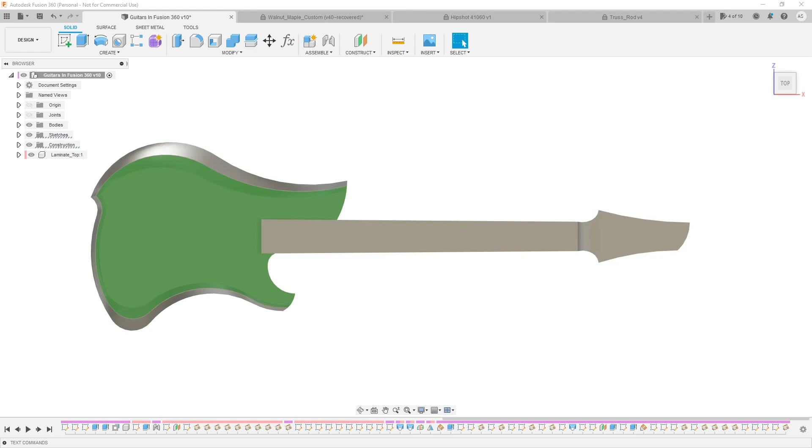Now we're actually almost done with the guitar. Most of the hard work is pretty much done. So we've got the main portion of the body, we've got the neck, we've got the headstock, we've got our laminated top, and there's not that much more to do except for the nitty-gritty details.

So today what I'd like to do is get the truss rod installed into the truss rod slot, the fretboard, the fretwire, the nut, and the bridge in place, and that should give us enough information so that we can know where to place the tuners, where to place the pickups and the pickup slots, and our electronics cavity and knobs, etc. in the final episode.

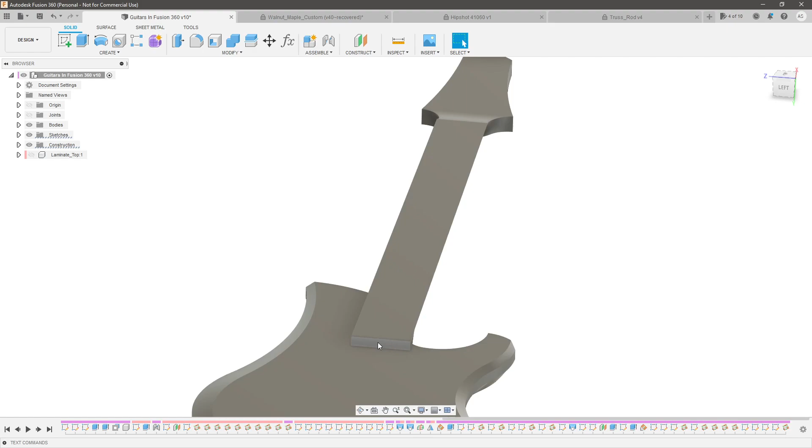Okay, so first things first, we want to get the truss rod slot cut into the neck. So let's hide our laminated top, and let's talk about the truss rod. There's a couple different types of truss rods that you can put into a neck. What I'm going to be using is a spoke wheel style, where there's a spoke at the end, or the heel end of the neck, rather than the type that protrudes outside of the headstock.

Now, the reason I chose to go that route, other than looks and accessibility, which I generally prefer the spoke wheel style anyway, but because I like to place my volute a little bit further back, that ended up making this section of the neck a little bit narrower than I would have liked. And so I don't want to cut into that neck any more than I already have, to prevent any disaster down the road. So what I actually would like to do is cut a spoke wheel style, which means it's going to be from like here on the neck all the way to the heel.

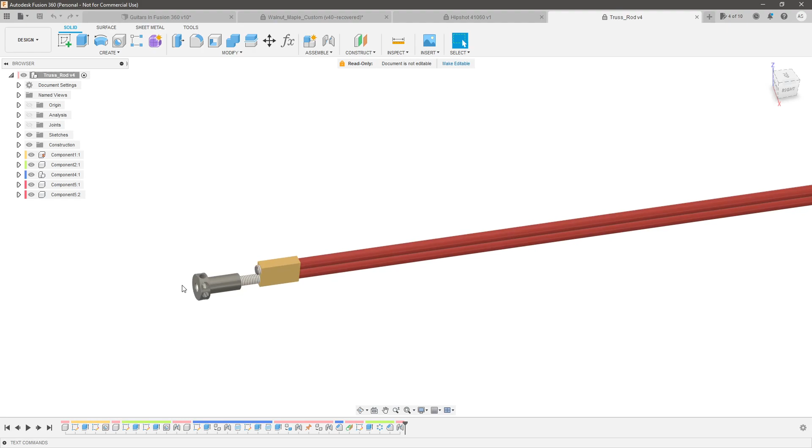So what's really nice is on StewMac's website, the Spoke Nut Hot Rod Truss Rod, it's quite the name, they have the dimensions right here. And that was enough information for me to go ahead and model my own. It took a little bit to extrapolate some of the dimensions out of there, but I was able to go ahead and model a truss rod, and I'm going to use this for my dimensions to cut into the neck.

So let's see where we're going to start. We're going to start from the spoke side up. So we've got a 1/2 inch diameter spoke connected to a 0.3125 inch diameter shaft connected to this block right here, which we'll end up cutting. So let's go back and let's start from right here.

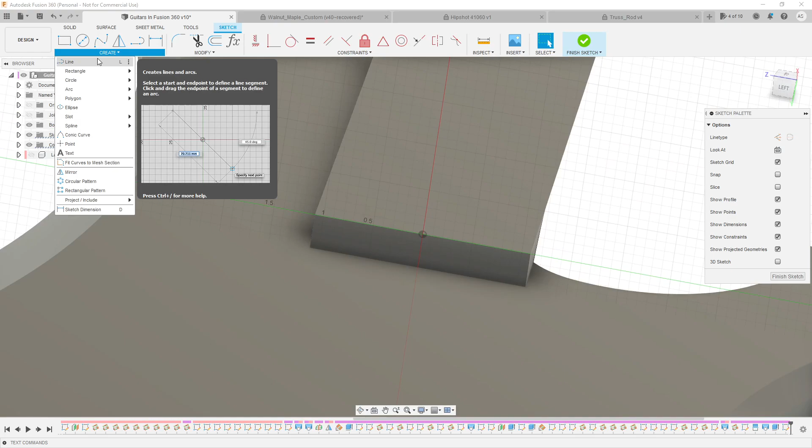Okay, so what we need is a midline. Make that midpoint. And we need it to be at least a 1/2 inch, but really because you're going to be rotating this and there might be a little slop, give yourself a little bit more. So let's do 0.625 inches to give ourselves a 1/16 on each side. And then we'll go ahead and just make it a rectangle. Okay, now what is the distance from here to the bottom of this?

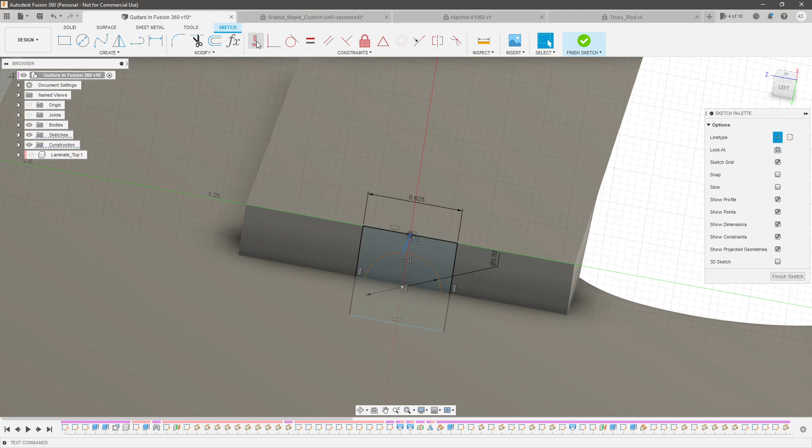Actually, we can distance it from the top. So we've got 0.0729 inches from the top of this surface to the top of the spoke. So let's give ourselves a circle, make it a construction, make it 1/2 inch. Let's make it centered or vertical to the midpoint. And let's dimension from this arc 0.0729 inches. Okay, so that needs to be the very bottom.

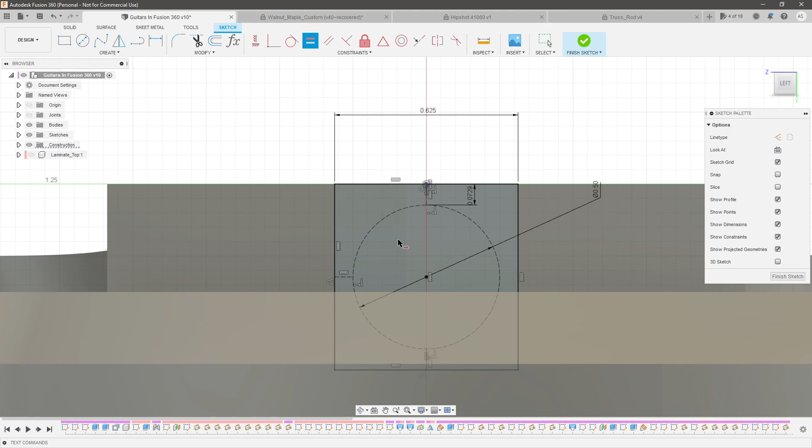That needs to be at least where this square needs to go down to. And since we went ahead and gave this, let's do that. Make that vertical. Give ourselves another line down here. Make that vertical. That way we can keep the distance equal on all sides. What we can do is just make these two equal. Actually, I guess I didn't even need that. So there we go. So that's the channel we need to cut out.

So how far do we need to cut it out? We need to cut at least the thickness of this, which is 3/16 of an inch, or 0.1875. I'm going to give myself a little bit more breathing room than that. So let's go ahead and cut it back 1/4 of an inch, negative 0.25 inches. Okay, so that's where the spoke is going to sit.

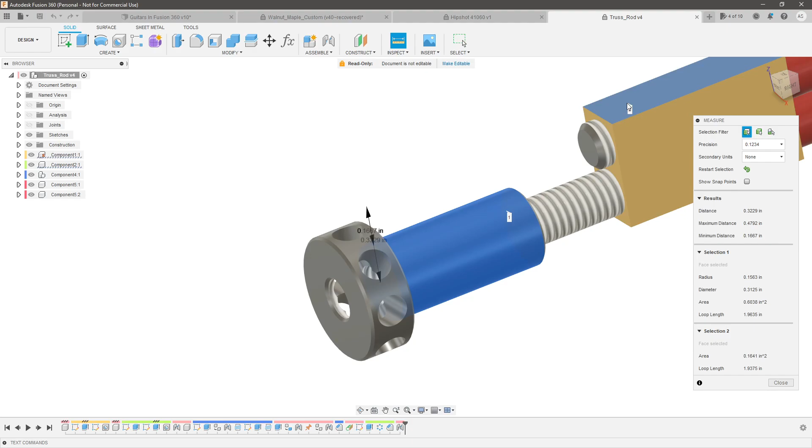Now we need to cut room for the shaft. So let's see, we've got 0.3125 inches. And what's the distance from there to there? Actually, we can just do it on center. So let's sketch on this surface.

Pull up the last sketch that we just did. Hold on. There we go. Okay. Let's project this circle in. And then what we can do is make that a construction line and add a circle there, 0.3125 inches. Actually, I'm going to undo that. Instead of bringing in the circle, let's just bring in the center point.

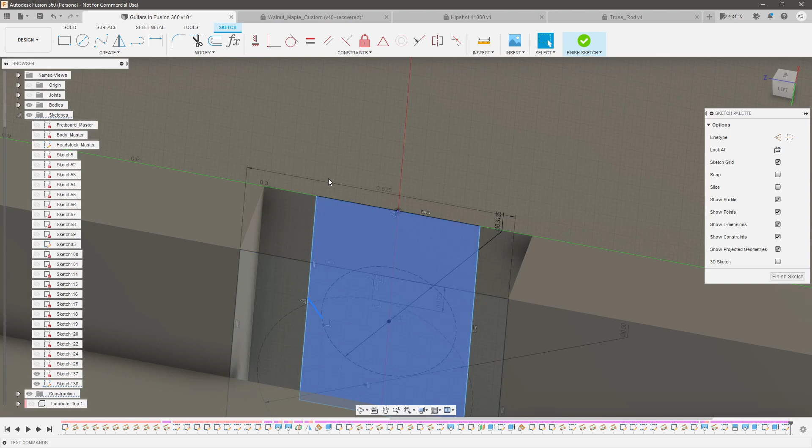Circle, 0.3125 inches. Okay, make that a construction line. And let's do the same thing. So let's go rectangle here, midpoint. Okay, and then let's make here to here. Actually, I don't want that at the midpoint. Let's do it from here to here.

Okay, so we want to give ourselves, let's say, a 32nd of an inch. We don't need that much clearance here. So 0.03125. And now let's do the same thing here. Make those horizontal and make these equal. There we go. So now we have our width so that we have a 32nd clearance on all sides.

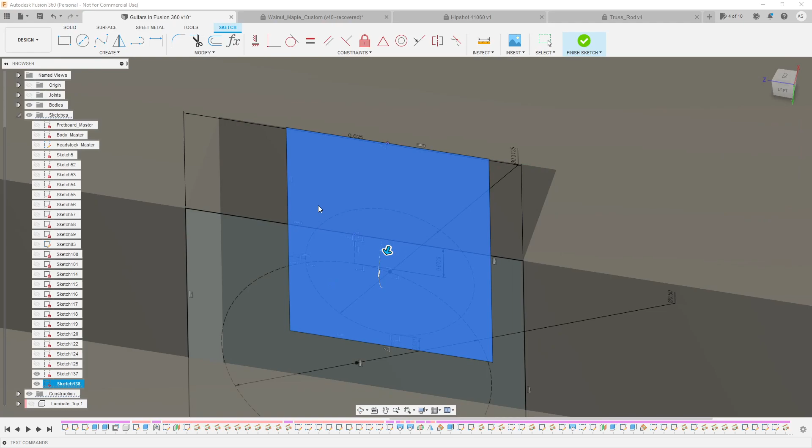And we need to cut that back how far? So from here to here, 0.625 inches. Okay. So cut that back, negative 0.625 inches. Okay, so now we've got that. All that's left to do is to cut from this surface back to here, which is 17.4375 by how wide? By 0.2188. So now let's sketch on this surface.

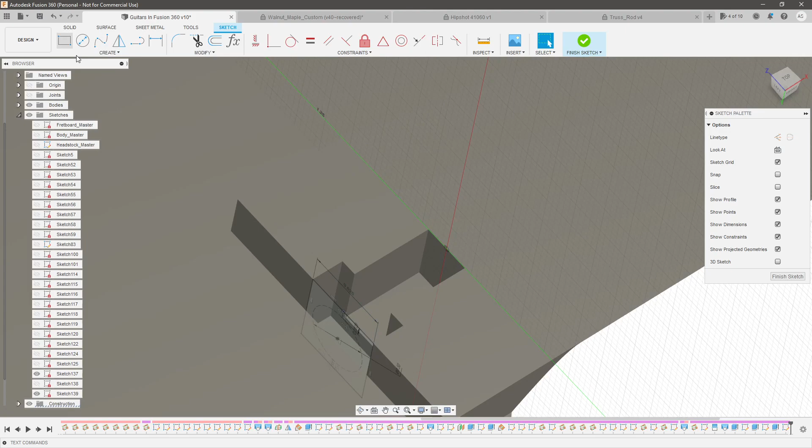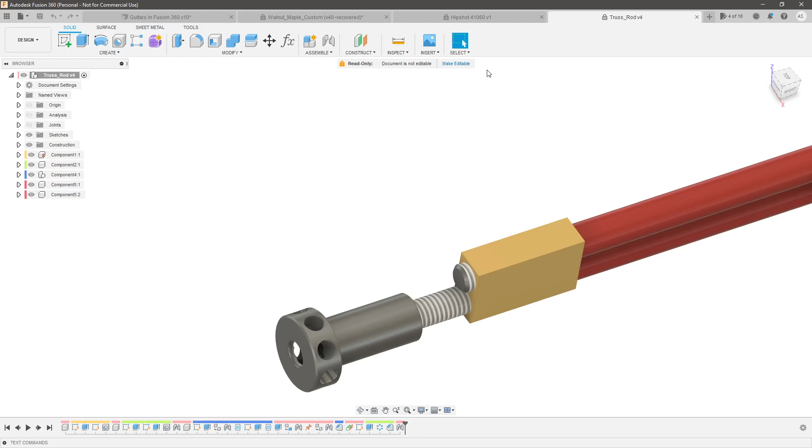Give ourselves another rectangle. Project that in. Make those midpoint. Go 0.2188 inches. Let's double check that real quick. 0.2188, yep. And then by how deep? 0.4375 inches. And how long? By 17.4375. Negative 17.4375 inches. And there we go. Our truss rod slot is done.

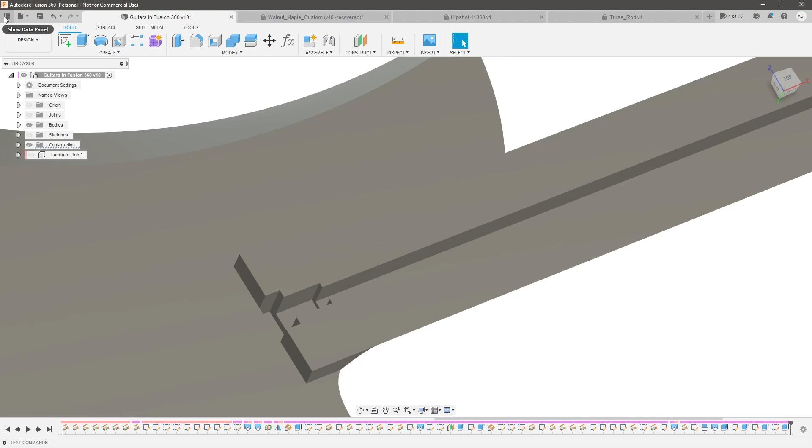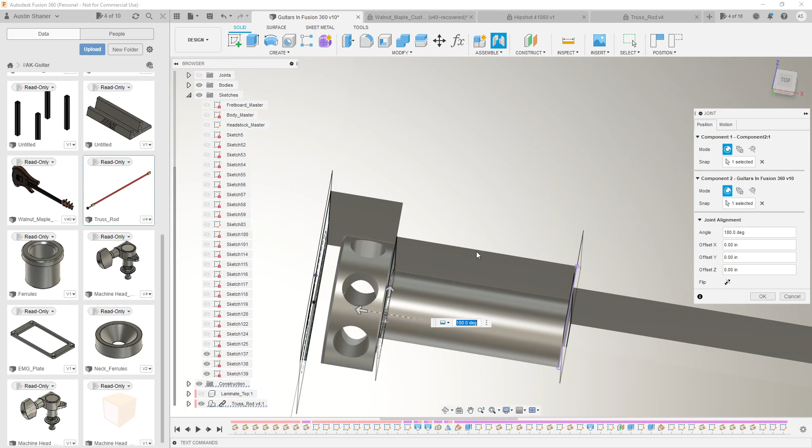So let's go ahead and drop that in. So grab my truss rod, drop that in. Okay, let's rotate it a bit into place. 180 degrees. Okay, and then what we can use is we can join this to our sketch. So let's pull up our sketch. And let's pull up the other sketch. Okay, so I want this circle to be joined to that circle right there. That way it's aligned in this direction rather than up against this side of the body. Hit OK. Hide our sketches. And there we go.

So you can see that the spoke is going to sit inside this channel. It's got enough clearance on all sides. I'm not actually worried about this dimension being too tight, because what's going to end up happening is as you tighten this, it's going to pull the truss rod a little bit towards it because it's captive by this flange here. So this is, in theory, the longest that the truss rod will ever be. It should only get a little bit shorter as it expands.

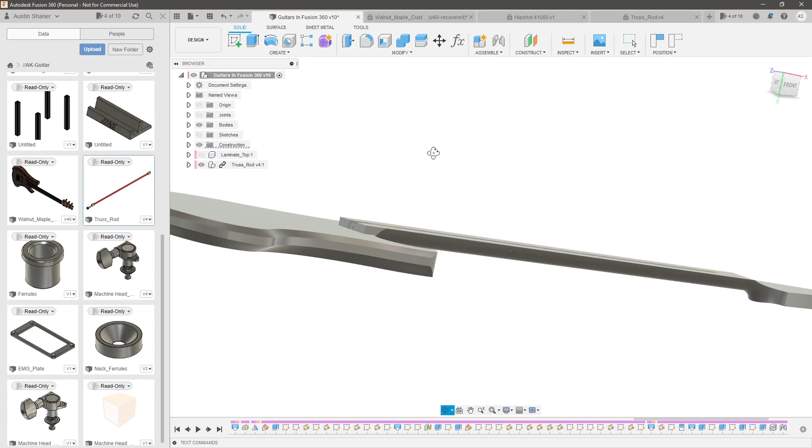Okay, so now that that's done, we can go ahead and work on the fretboard. So let's go ahead and create a new component called fretboard. And let's sketch on this surface. Continue. Come on. My computer's freezing up. There we go. Okay.

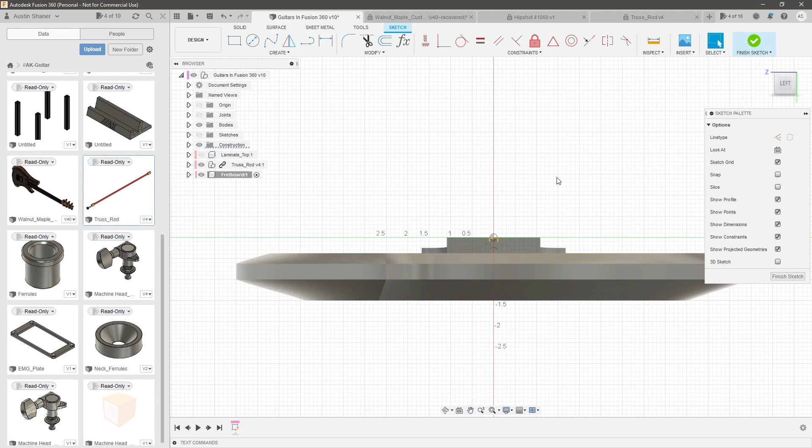So what we want to do is bring in this line. Actually, let's bring in this line. Then go here like that. Make this coincident to there. I guess I actually didn't need that line. So let's delete that. Come up. And now the question is, what is our radius going to be? Now this is a highly debated topic in the guitar community. What's the perfect fretboard radius? It really just depends on your feel, what you like to play.

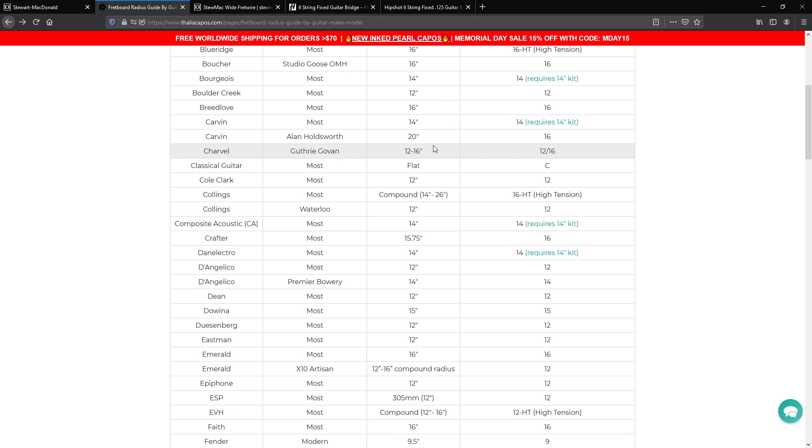A quick Google search found me this website from Thalia Capos, I'm not sure how to pronounce that, but it gives me the fretboard radius by make and model, the average fretboard radius on most of their guitars. So you can see as you go down the list, most of these companies hover somewhere in the 12 to 14 to 16 inch range. Fenders typically have a tighter radius. So some of the vintage Fenders are only 7 1/4 and modern ones are 9 1/2.

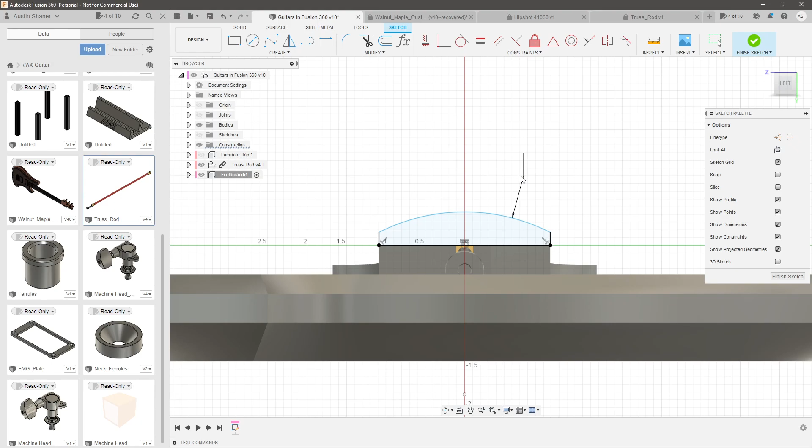I've personally played a lot of Ibanez, and they use a lot of 12 inch, a couple 10 inch. They have a couple big ones as well. I've personally really liked their 12 inch style, so I'm going to go 12 inch radius. Oop, that got brought up a little bit. Okay. We need these to be horizontal to each other to help avoid that. And then the question is, what is the height? So it's pretty common for fretboards to end up being around 1/4 inch tall.

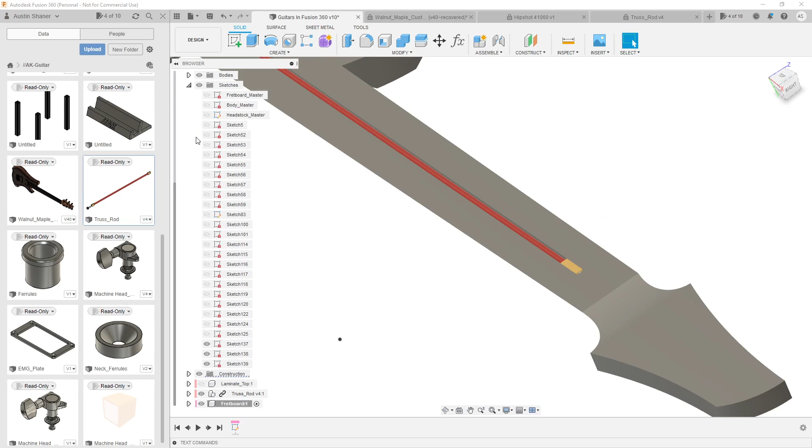So with the 12 inch radius and 1/4 inch tall, should be good. So that's one side of it. Now we need to go ahead and sketch the fretboard at the other side. So let's go construct plane at angle from here. Actually, let's bring back our fretboard sketch. We want to do it from here because the nut is going to be out here.

So construct plane at angle, 90 degrees. We'll sketch on that plane, and we're going to do the same thing. So let's just project in that line and hide our fretboard sketch now. Go line up, create an arc between the two, make these two horizontal. Let's dimension to the top of that real quick. So 0.25 inches. Give this a radius of 12 inches.

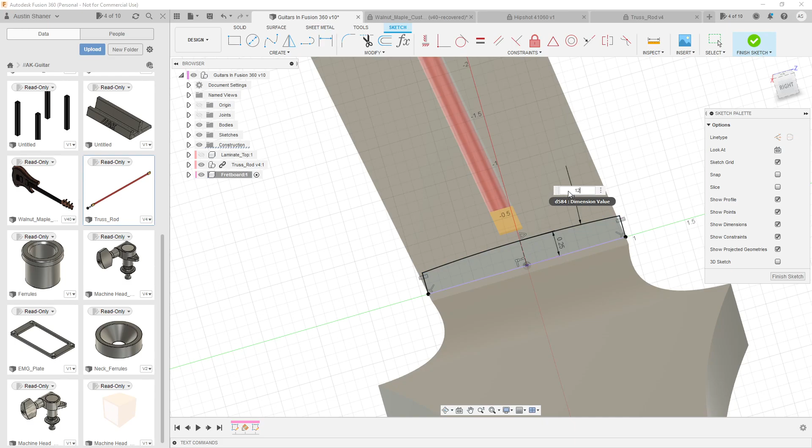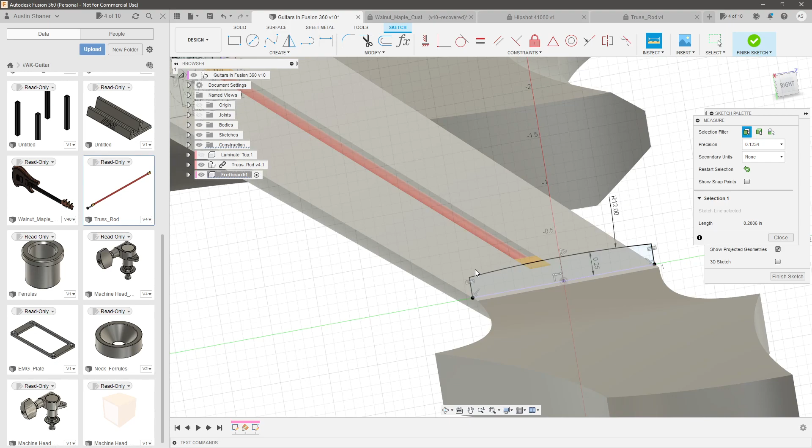Now that I've got that modeled up, I want to see if this height is the same as back there. So we got 0.2133 inches. And what is this height? 0.2006. So that's actually a little interesting, because we have the same radius, but because the neck is tapered, this line would kind of be over here. So this actually ends up being a little taller, which means it's going to taper down to the back. And I actually don't want that.

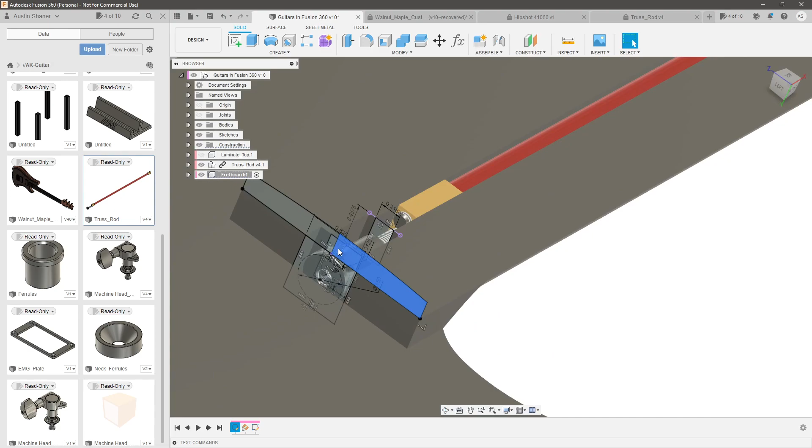So in this case, I'm not going to dimension the height. I'm going to keep my radius, but this time I'm going to project in this line right there, and then we'll make these two equal. So that way we have a straight line all the way back, but we maintain the same radius. Okay, so we've got that. So now all we need to do is loft between the two. I need to also update that sketch to make this a construction line.

There we go. So now we can click here. We'll create loft from here to here. And let's hide these sketches, get those out of the way. And let's bring back our fretboard sketch and hide the bodies. So we want to use these as rails just to make sure nothing gets a little hinky along the way. Hit OK. Bring back our body and hide the sketches. Okay, so there's our fretboard, but because it's a new component, it's not joined to anything.

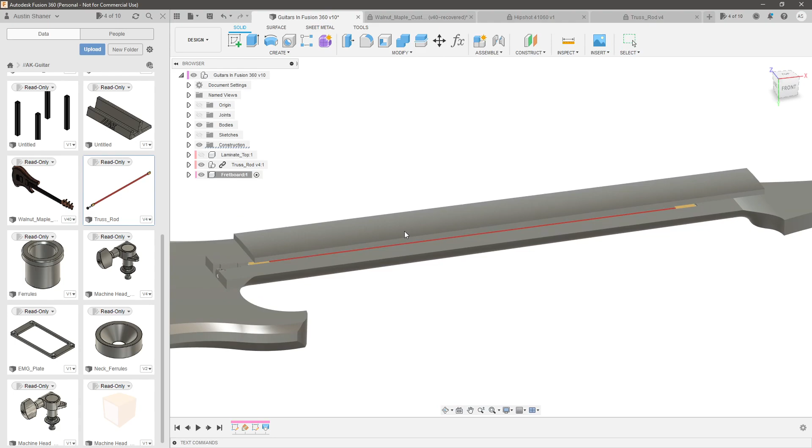So I'm going to bring back that sketch and join the bottom edge of this front to, oh, come on, let me select it. There we go. To this line right here on the sketch. That way now I can't move it. So let's hide the sketches. Bring back our laminated top. And let's give the fretboard a color, just like we did with the laminated top, so we can differentiate that from the neck. So I'm going to give it blue for now. And that's already roughed in.

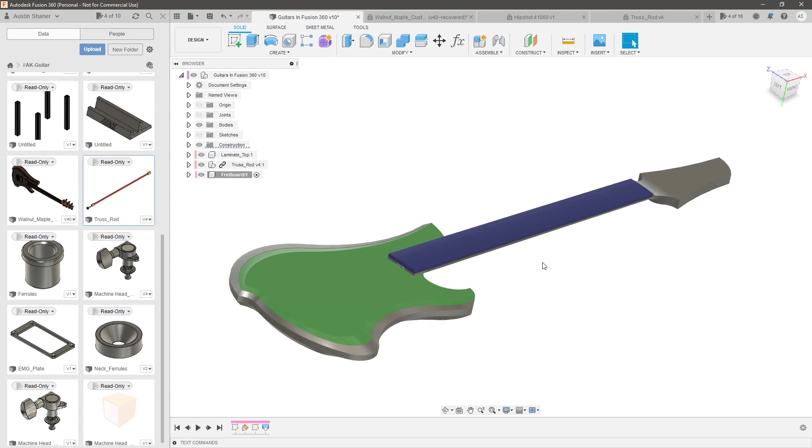So we quickly got the truss rod installed into the truss rod slot and got the main portion of the fretboard taken care of. Now what we need to do is cut the slots for the fretwire and then model in the fretwire. And that's going to take a little bit of time, so bear with me. Okay, so we need to create a plane that we can cut up from. Typically if you're using an actual fret saw, you would cut down from the top to a certain distance. What I prefer to do, so things don't get messed up later, is to create a plane and cut up. So let's go create offset plane.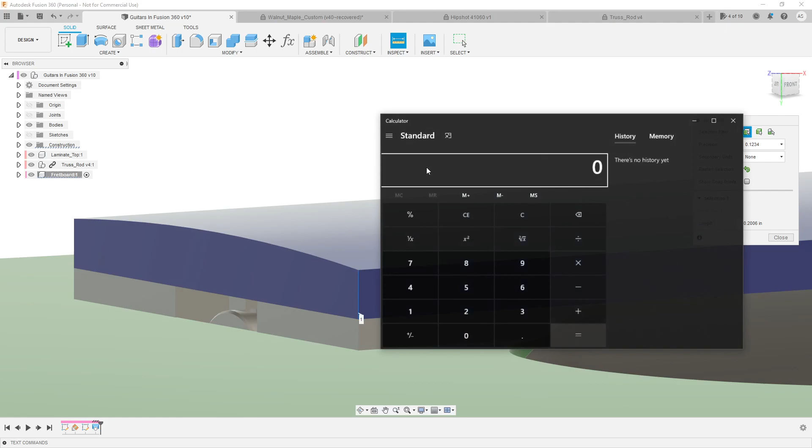So what is our height here? We've got 0.2006. So we need to do 0.2006 minus 0.074. I'm going to check that real quick just to be sure. Let's go back. Where are we? There we go. 0.074. Yep. Okay. So let's create our plane from here up 0.1266. Yep. So that should, in theory, give us a distance from here to here of 0.074. Yep, so we nailed that.

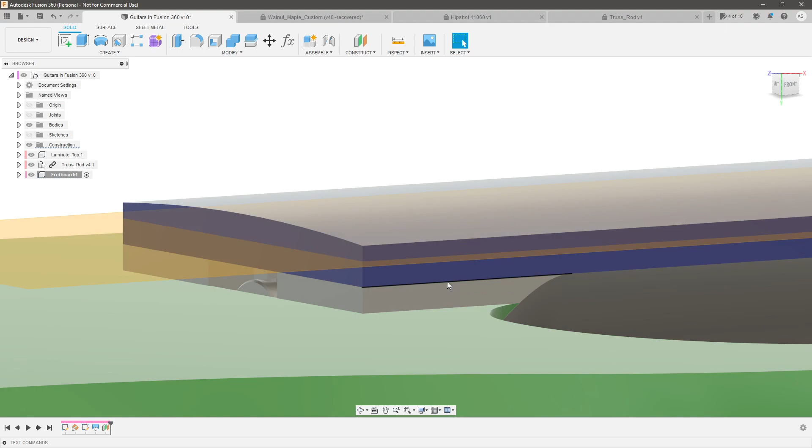Okay, so let's sketch here. Let's go ahead and hide our bodies. Laminated top, hide the fretboard, hide the truss rod. Let's bring in the sketch. So now what we need to do is project in every one of our frets from our original fretboard sketch. So let's bring these in.

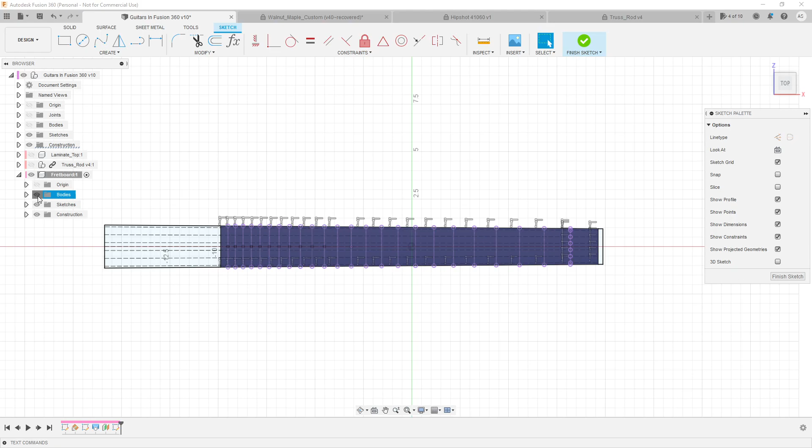So I probably could have just highlighted these all at once, but it doesn't take too long. Select them all. Oop, that one I need to select the whole row, so double click, hit P for project, bring those in, bring our fretboard back in. And now we can hide that sketch. So this is what we're going to be sketching on.

So we do a midpoint rectangle. Oop, back, rectangle or center rectangle. That. Select the midpoint, select this, hit a midpoint constraint so that way it centers it. Now according to StewMac's website, our fret wire is sized to fit a 0.023 inch fret slot width. So we need to go back and make this 0.023 inches. Now that made it too short, so bring it up.

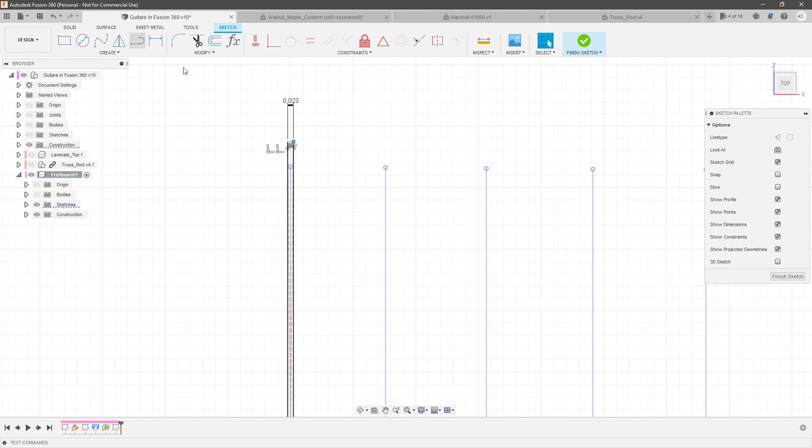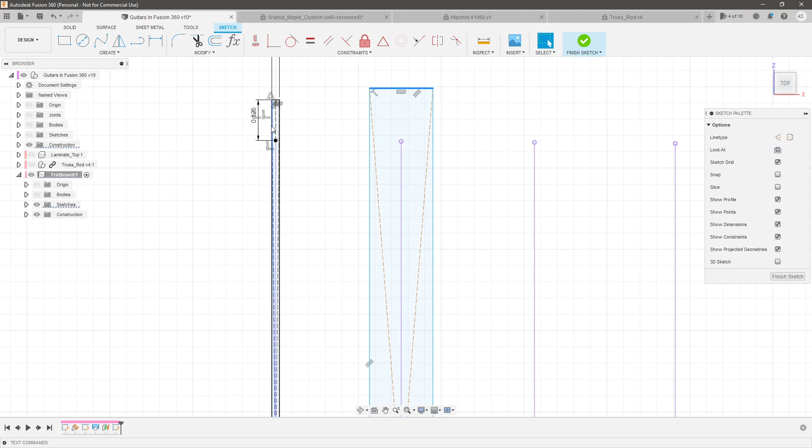And let's make it stick out a bit further from the fretboard, so that way we can guarantee that we're going to cut all the way through, because remember there's a taper going down. So let's give this a construction line here and dimension that, let's say 0.125 inches. Just go off the fretboard by 125, and since it's a midpoint, it applied the same thing to the other side. So now all we got to do is basically do that for the rest of these, but in this case we can just make this one equal and make these two equal like that, and it's done.

So you're just going to do that to every single one, and then I'll be back in a minute. Might do a time lapse here. Okay, so thanks for bearing with me on that. So we've got all of these fully constrained. Let's go and bring back our fretboard body, and let's do a cut extrude.

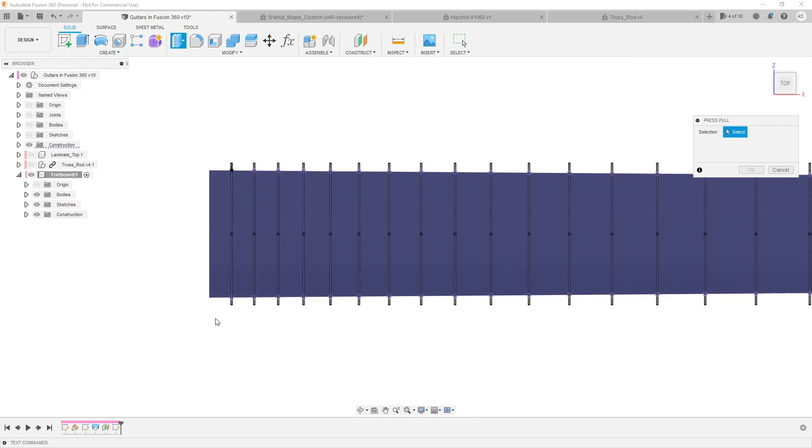Select all of these. It's also quite tedious, but you can see why we extend it off, so that way it doesn't end up cutting short of the edge of the fretboard. So let's do that. Keep going. Every time I got to select 24. It's quite annoying. Okay, almost there. One more. Okay. Now we want to cut up through all. Hit OK.

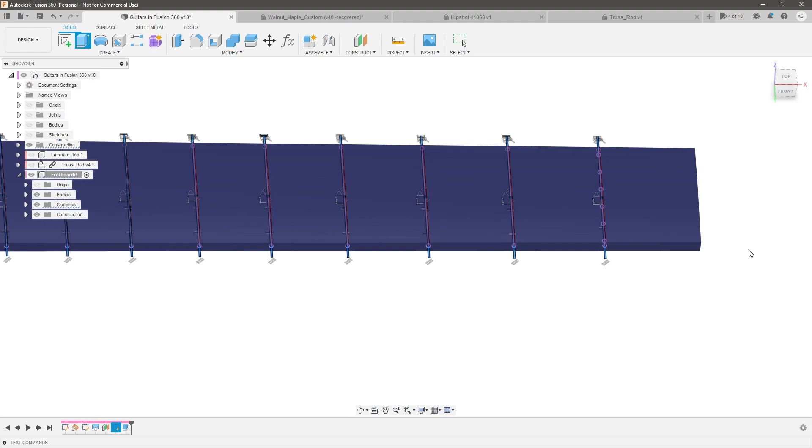Take a second to load. Now let's go ahead and bring back our body so we can see how this all looks. Okay. So now not only do we have our truss rod slot and our truss rod installed, we've also got our fretboard with our fret wire slots in place. So now what we need to do is go ahead and model the fret wire.

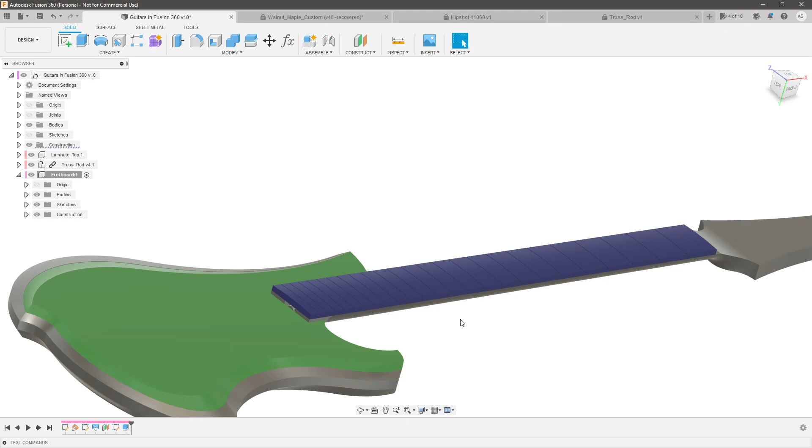This is going to be probably the most annoying or tedious part for everybody, but there's really probably two ways to do this. I'm going to show you the method that I use, but you can certainly do it any method that works for you. So go ahead and sketch on the side of the fretboard. We're not going to create a horizontal plane. We're going to sketch on the side of the fretboard. And what we need to do is we need to model one of the profiles of the frets.

So if we go back to our website, let me zoom in for you guys. We've got the crown width is 0.110, the crown height is 0.053, and the tang's 0.074. So what we need is a shape that looks like this. So we need an arc, make these two horizontal. We need a line coming in, a line down, a line coming over, line up, and a line connecting. Make these two, oh, those are going to already be horizontal.

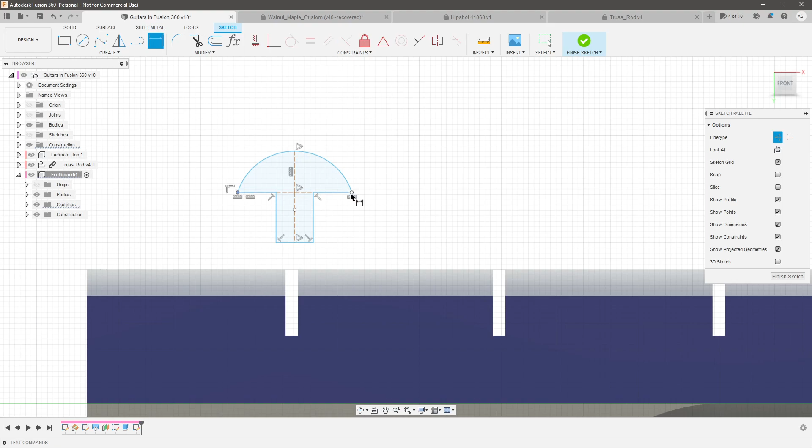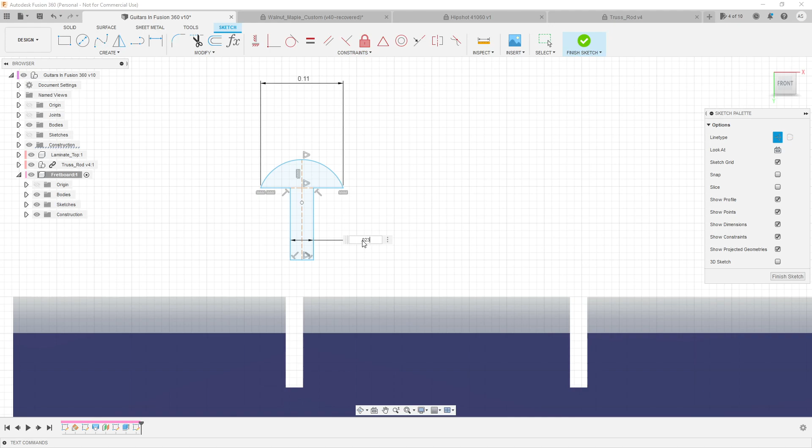Let's give ourselves a midpoint construction line, so that way it's easy to dimension from the height. Make that vertical. Do one down to here. Okay, now what we need is 0.110 on the width here. 0.110 inches. And we know that the width is going to match the, sorry, I went to the review section, 0.023. So 0.023 inches. And the height is 0.074.

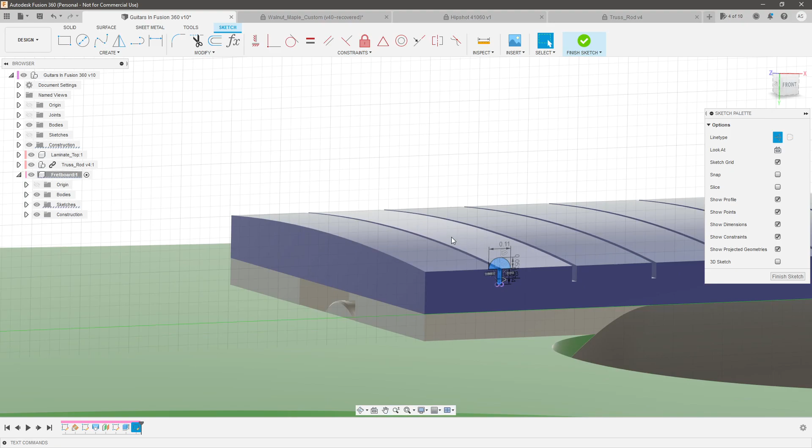Now we didn't give ourselves the height of the crown, so that's 0.053. 0.053 inches. Okay, so that should be basically fully defined. It just doesn't know where to put it in space yet. So all we have to do now is come here, select this line at the bottom, and hit midpoint. And as you can see, everything's lined up and we're good. So I'm going to show you how to do one, so that way it'll make sense what I'm doing during the time lapse in a moment.

So what we can do is, instead of extrude, we can go create sweep. We're going to sweep this profile up this path. Now you can see it's trying to create it for us, but we don't actually want to cut. We want to extrude it. So let's go ahead and actually hit new body.

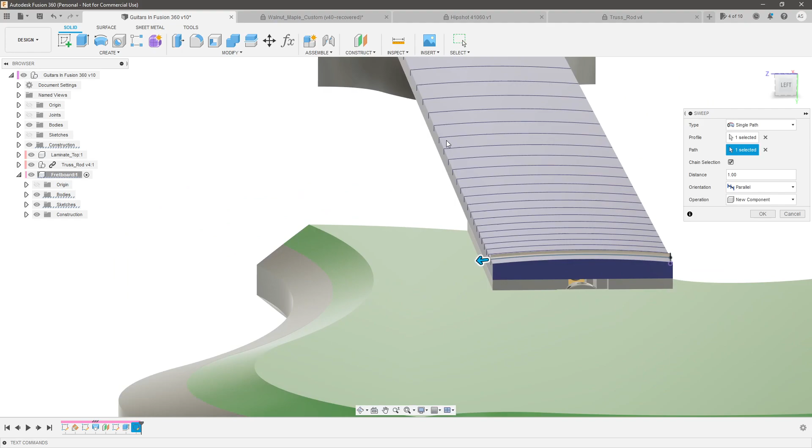Actually, let's make this new component. Now, I learned from doing this already that this one works fine as parallel, but as you actually get down the taper, where it needs to be parallel ends up raising up part of the fret off of the fretboard up at this end. So what we're going to do is we're going to do perpendicular.

Now what that does is, if you imagine as this rotates, since this is vertical, as it rotates over, when it hits this point, it's actually going to be angled inwards. So rather than adjusting and making it flat, we're going to make this perpendicular for now, and that'll all make sense why I did that in a moment. So if I hit OK, that's how you do one fret.

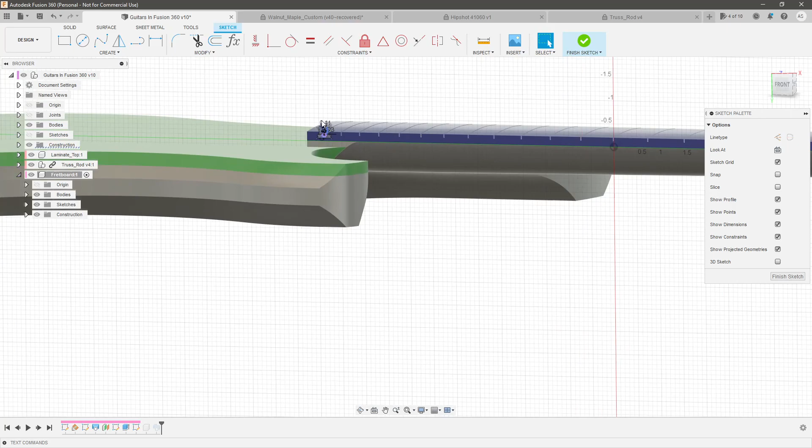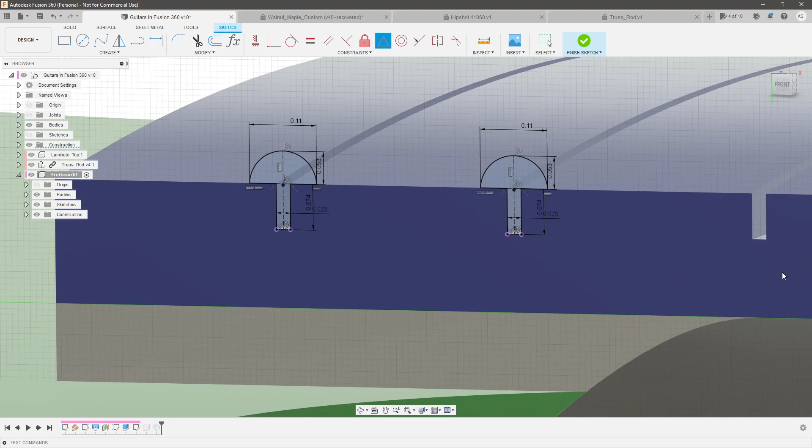Now, all we have to do is come back into this sketch before we added the fret, highlight all your lines, Control C for copy, Control V for paste. Then you can just paste that over, and that keeps all of our constraints, all of our dimensions. Make that midpoint, hit finish, and you can go back to your sweep, and then you can add this profile to the same thing.

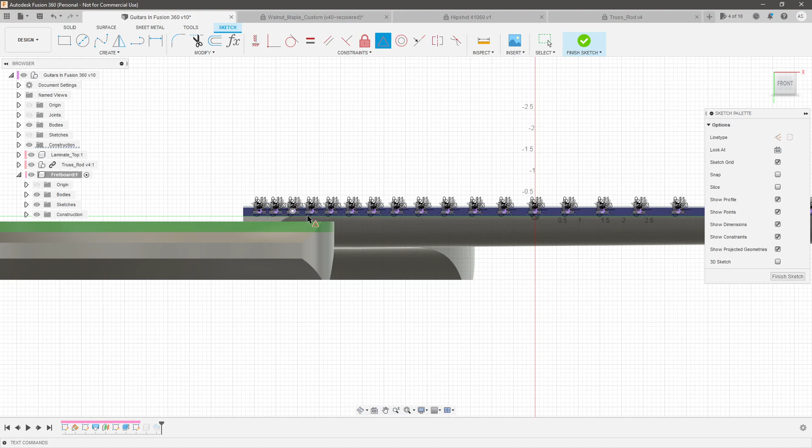And all I'm going to do is copy and paste all of those frets down the row, go back to my sweep and add them all in, and I'll be back with you guys in a second. Okay, so that's all added back in. Let's go ahead and hit finish sketch.

Now, obviously, I'm trying to skip some time, but the proper way to do that would be draw each one and give some constraints to all those lines so that they're equal to each other, so you only have one set of dimensions that you can go back and edit later if you want to change to, let's say, the jumbo frets or the narrow frets. I did it that way to save myself time because I already knew these are the frets that I wanted to use. If you're still trying to figure that out, I would end up drawing those in, adding some equal constraints, and only having one set of dimensions that you need to edit.

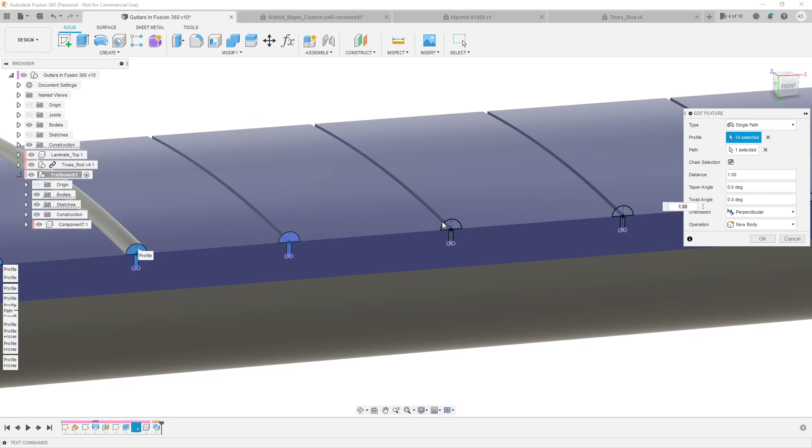So let's go back to our sweep and let's add in more profiles. So here we go, keep going. There. This is one of the most tedious portions of the design because there's just so many of them.

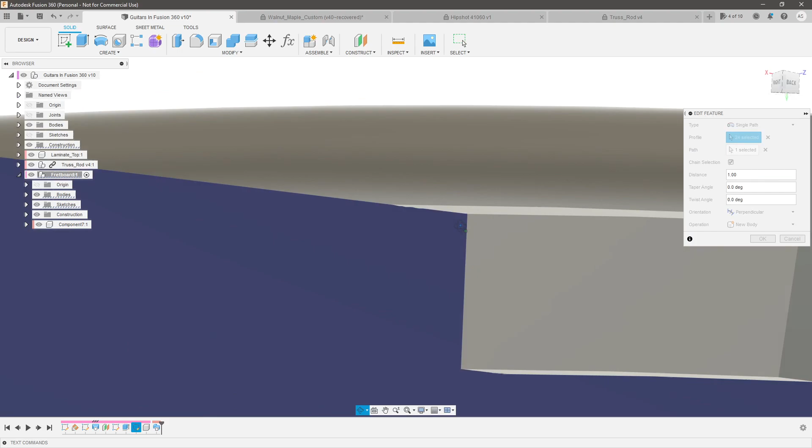Okay, so now let me show you why I chose perpendicular. As you can see, the frets are going to extend off of the fretboard. That's what we want. If I were to choose parallel, it actually raises it above the fretboard, and obviously that's not what we want. But if we choose perpendicular, it does look like it just starts to clip into it a little bit, but actually it's not too bad. It's just barely underneath, and that's fine.

These frets don't have really any major impact on our design. They're mostly visual aspects so that we can see what's going on and maybe do some nice renders, etc. But it actually does help us a little bit in setting the height of our nut, so that way we can set our action. Words are hard. So go ahead and hit OK.

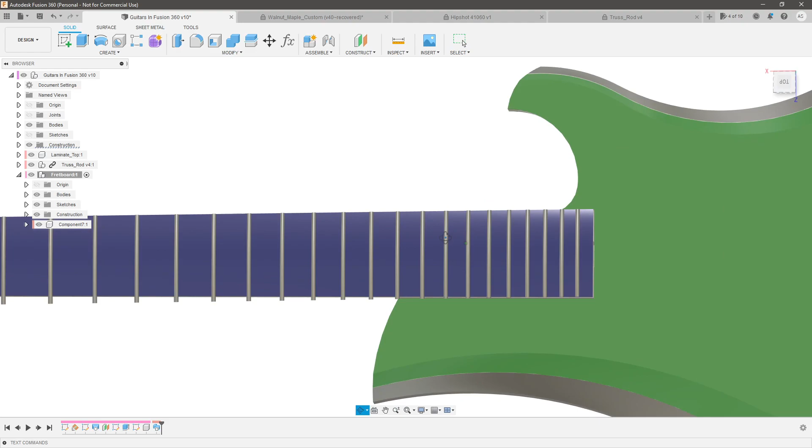Let that compute. Okay, so just like when we're actually installing real frets, our frets ended up extending off, and now we need to clip them off. So let's go back to that construction plane that we created right here. Let's sketch on that. Let's bring back our fretboard sketch. Project these two lines in.

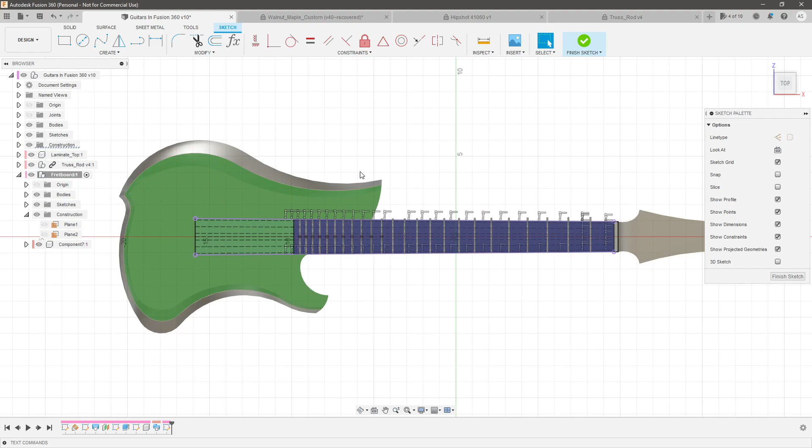And then all I want to do is come up from here. Let's go up a little bit. Connect those. Vertical, it's already vertical. And let's go up 0.125 inches. Let's make sure that it's clipping all of them. Yep. Grab that sketch that we just drew. Extrude up with a cut like that. Hit OK.

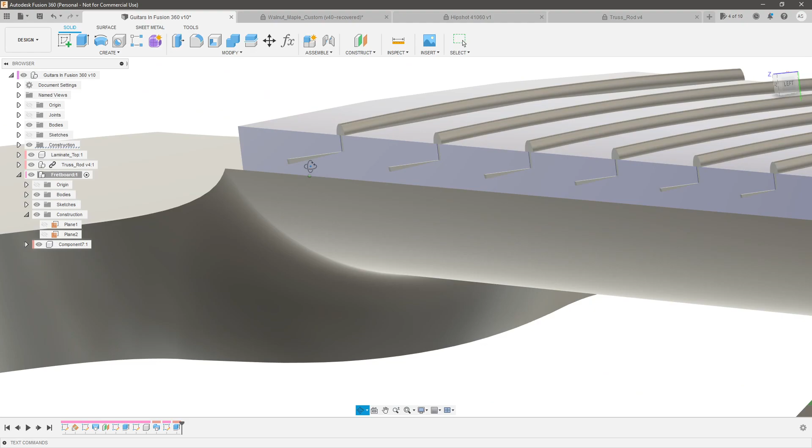Let's hide our sketches. Now I did something wrong, as you can see, because I went from the bottom of that. So I'm actually going to cut in two different directions. So let's go back to that. Go two sides. Side one, let's do all. And then side two, we're going to go down 0.125 inches. Yep, so that'll just take us back to the bottom of the fretboard, roughly. So hit OK.

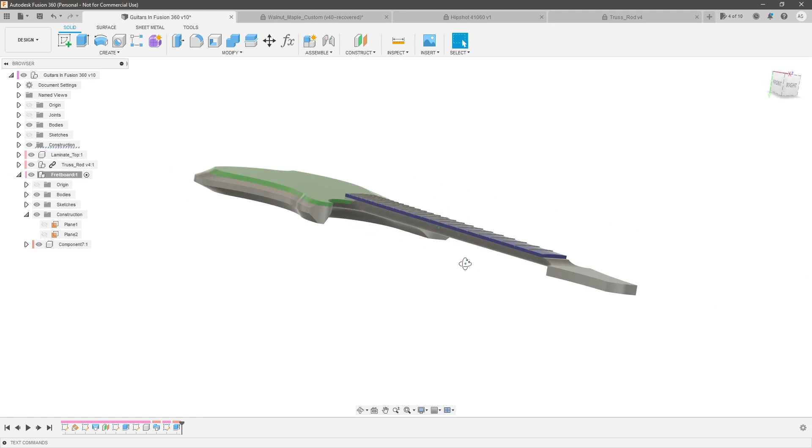And there you go. So now we've got the flush fret wire at the end on every one of these on both sides. So tedious, but that's the fastest way I've been able to do that. And since these are mostly a visual aspect of the guitar in the Fusion 360 space, I don't really care that these corners right here are just a little clipped off because we used perpendicular, not parallel. But if you were really concerned about it, then you'd have to model and sweep each one individually, and it just sounds like way too much work. So I'm totally fine with that.

Okay, so let's go ahead and get the nut in place.

I realize we're kind of powering through a lot today. I need to get a lot of this done so that way I can finish this in the next episode, because the baby's going to be here in July and I'm not going to have much time after that to work on this.

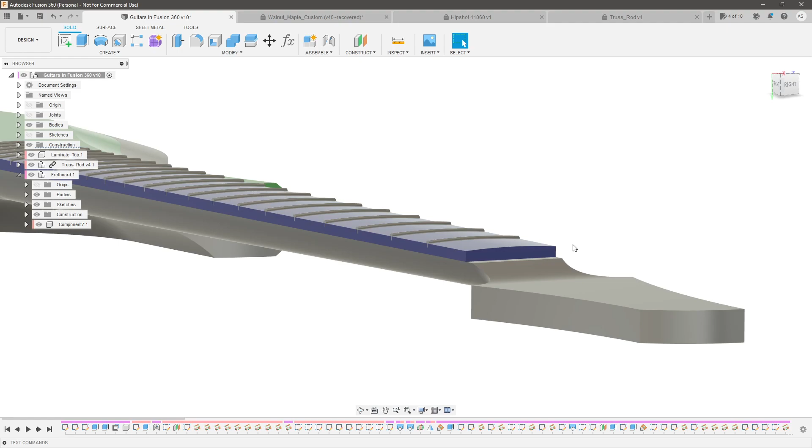So let me go ahead and create a new component. Call it nut. Now there's a couple different ways you can approach the nut. I'm going to go ahead and use the captive version. So what I mean by that is I'm not actually going to recess a slot for the nut in place. I'm just going to put a dab of super glue and let the tension of the strings hold it in place. But you could absolutely cut a slot from here down. And let me show you how you would do that.

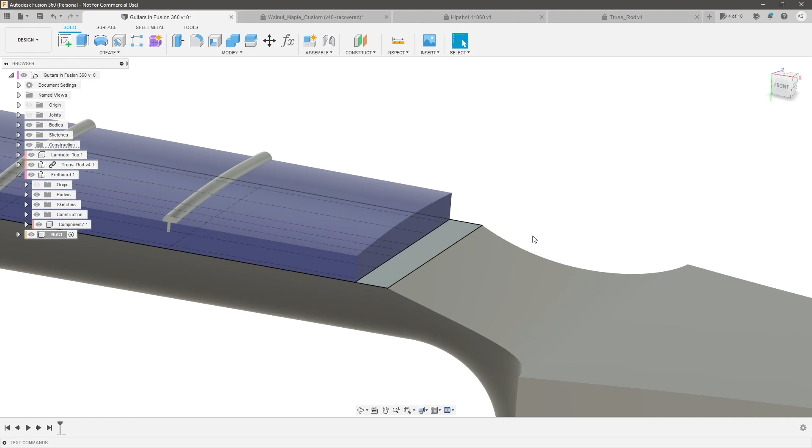So open up our sketch here from our fretboard, and then we could just cut that down. So cut. We cut that down whatever dimension we need, and then extrude a nut up from there. But what I'm going to do is I'm just going to go ahead and extrude up. Now I'm going to extrude up an arbitrary amount, so 0.5 inches. And then what we're going to do is we're going to cut that away, cut the radius away.

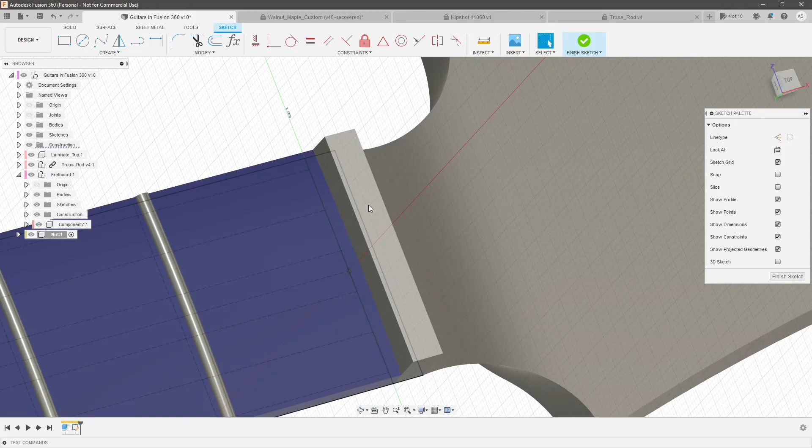So let's sketch on this surface, and there's a good reason for that. Because remember, this is still tapering in. So if I sketched on this surface and cut back, then I'd end up clipping off just a little sliver of material here. So we want to sketch on this surface. Then we can take the radius of the neck at that profile. Let's go ahead and hide our fretboard. And so all we want to do is go offset.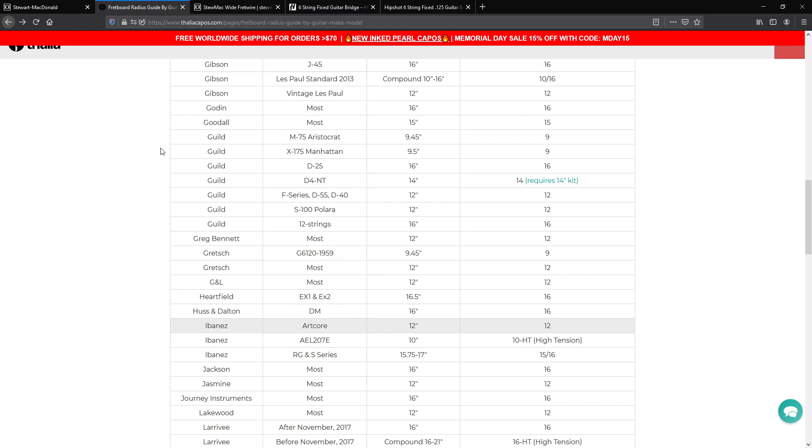Now let's offset it at minimum the height of the frets. That's the minimum you would want, because you don't want it lower than the fret, so that way the string's always touching. So if we go back to our frets, it's 0.053. So I'm actually going to just round it up and go 0.065 inches. So it's just slightly higher than the frets themselves.

Now what we can do is just sketch up like this. Connect those dots, make it vertical, vertical, and make these two midpoint. Oop, and make that horizontal. Okay, then we can grab that sketch, cut it through to the back side of the nut, and now we've got our nut roughed in place. So let's bring the fretboard back.

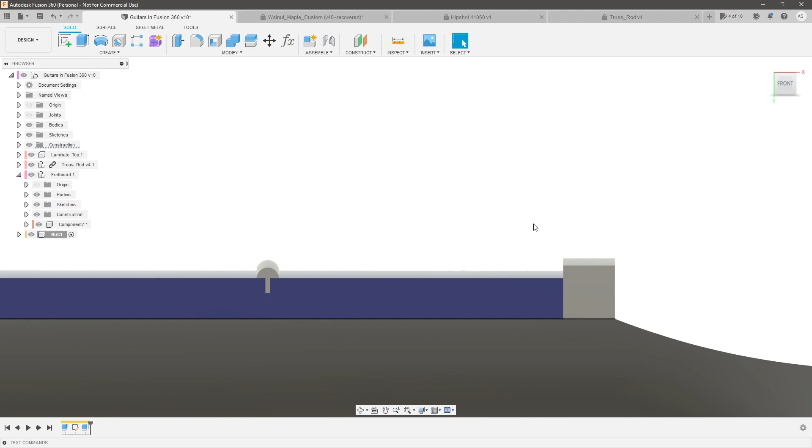Now you can see that it's actually just slightly higher than the top of the crown, and that's kind of what we want. So in my design, I'm not going to actually put in the string cutouts, what you would file in for the strings. I don't really care because I'm going to be hand making that anyway. I'm not going to be making that on the CNC. This just gives me rough dimensions of what I need to actually cut, and that should do it.

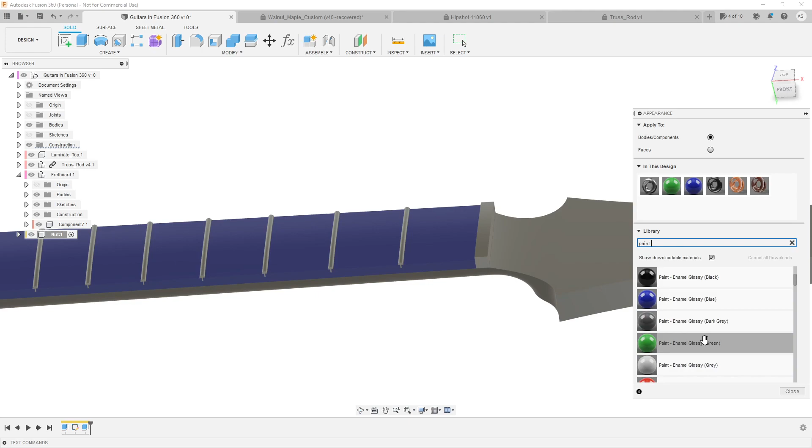So moving on, let me hide the sketches. Now that we've got the nut, the fretboard, the fretwire, the truss rod, and the truss rod slot, actually, let me apply a quick appearance to that. So let's go paint. Let's make that red. Why not? Okay, so now we can differentiate it. Now, again, we will be applying proper appearances to this later. So now the last thing we're going to do is we're going to put in the bridge, and then we can go ahead and call this video a wrap.

So let's bring back our sketch. Now the Hipshot bridge, I'm going to be using a 6-string fixed guitar bridge. Now let's make sure we got the right one. So according to Hipshot's website, we have a 0.125 inch floor height designed for action on guitars with non-angled or low profile necks, which is what we have. They also have a 0.175 floor height version, which is kind of for more Gibson style, where you've got an angled or a raised neck or bridge pockets, etc. if you wanted to recess it down. So since I'm not doing either of those, I need to make sure that the model I have is 0.125 inch floor height.

So if you go to grabcad.com and you just search Hipshot, this guy named Alex D made an excellent model of a Hipshot bridge. So I just went ahead, I already have an account. If you don't have an account, create an account, and then you can just download that and import it into your model. So let me bring that up. Where is my bridge? Here we are. Drag that into our model. Okay, let's rotate that 90 degrees. Yeah, that's the right orientation. Okay. Hit OK. Let's see if it separates.

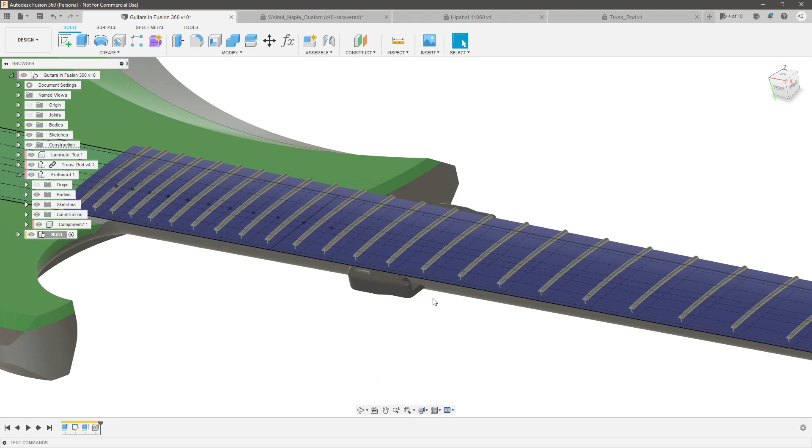Yep, so see, some of the pieces here are not joined together. So what I'm going to do is select... oop, I dropped that into the nut. Let me delete that, go back to the main design and re-add it in.

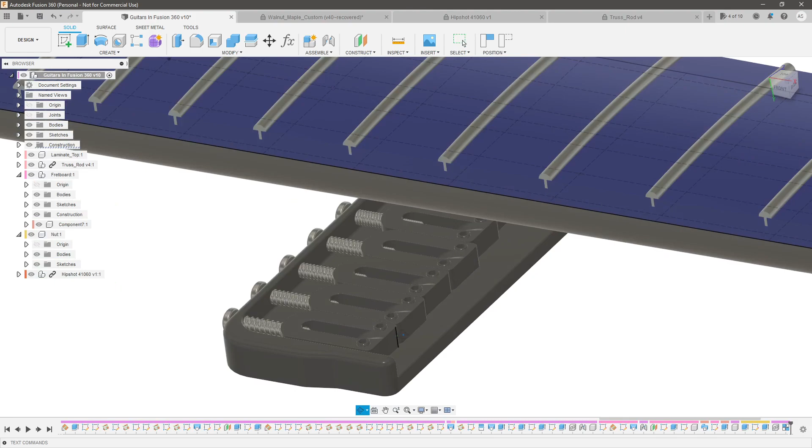Okay, rotate this 90 degrees, hit OK. I'm going to select the whole Hipshot bridge, right click and say rigid group. This way I don't have to apply any joints or mates, I can just lock the position of all these things in place.

So now let's go ahead and get that roughly in place. Ooh, I dragged that right into my model. Okay, let's get this roughly in place.

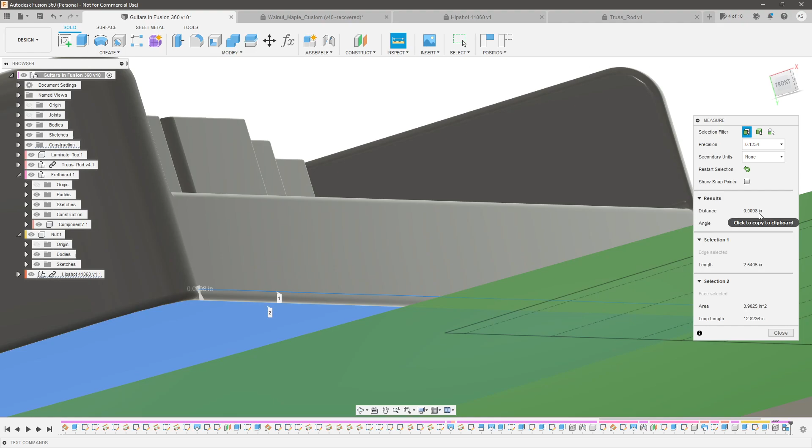Okay, so now we can use our fretboard sketch to go ahead and join these together. Problem is there's a little bit of a radius here, so what I need to do is measure from here to here: 0.0098, so 9.8 thousandths of an inch.

So let's go ahead and join this to that. It's going to join it a little too high, so let's go minus 0.0098 inches. Okay, hit OK for now.

Now I do realize this is elevated, so now we need to measure the distance from this surface to this surface: 0.125, because that's how much we raised the neck off of the laminated top. So let's go back to our joint and drag this down 0.125 minus 0.0098. Hit OK.

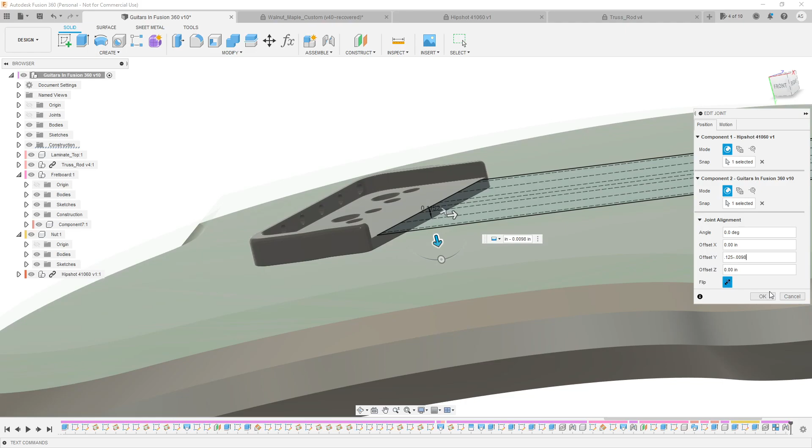And let's make sure that that's lining up. Yes, that is flush with the bottom, or the top.

So now, obviously, this is in the wrong place because the end of this line is the end of your scale length. So this line right here is in theory where the string should be touching the bridge. So let me bring the bridge joint back up.

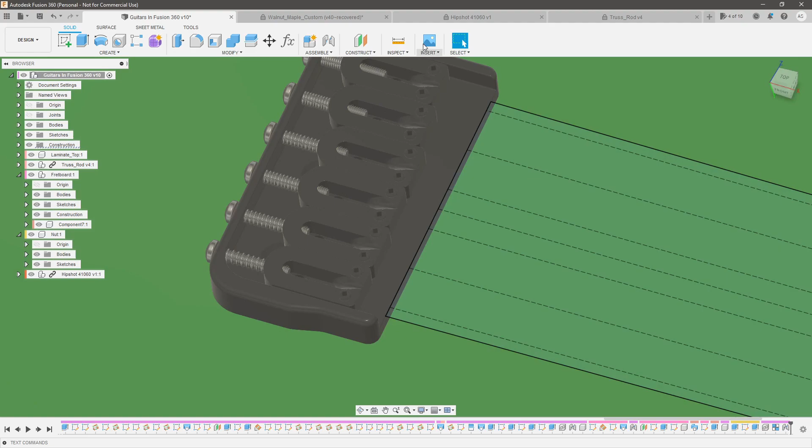Or actually, I need to measure the distance between here and here. So it's 0.2227 inches. I'm going to copy that. Joint, come back in, 0.2227 inches.

So that should bring this on top and roughly align the strings with the center of each of these. Now it's not perfect because of the string spacing I gave it in FretFind2D, but it's really close, only a couple thou off. So I'm perfectly fine with that.

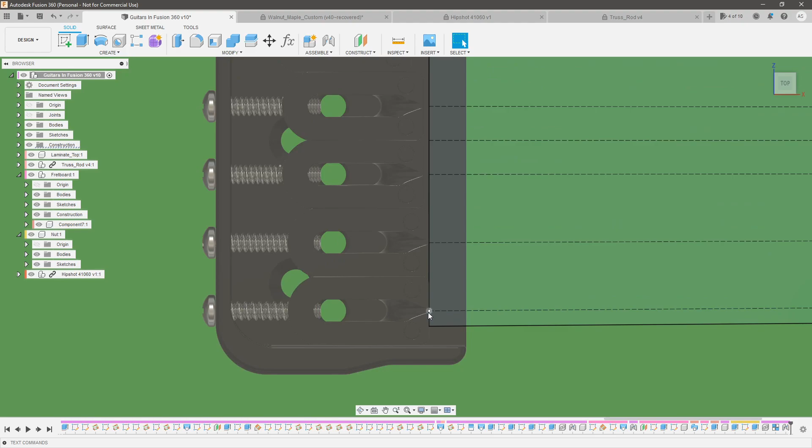Now, the reason I aligned it this way is because this one is the furthest one forward. Typically when setting the intonation of your guitar, you set it as far forward as it can go, mount your bridge there, and then pull back as necessary. Maybe give yourself a couple threads going forward, but typically the high string doesn't need much, while the low strings end up getting pulled back quite a bit. So that's typically how I would set the guitar bridge.

So that pretty much covers it for today. We actually got a lot done in a fairly short amount of time. We ended up getting the truss rod and the truss rod slot in place, and we got the fretboard along with the fret wire.

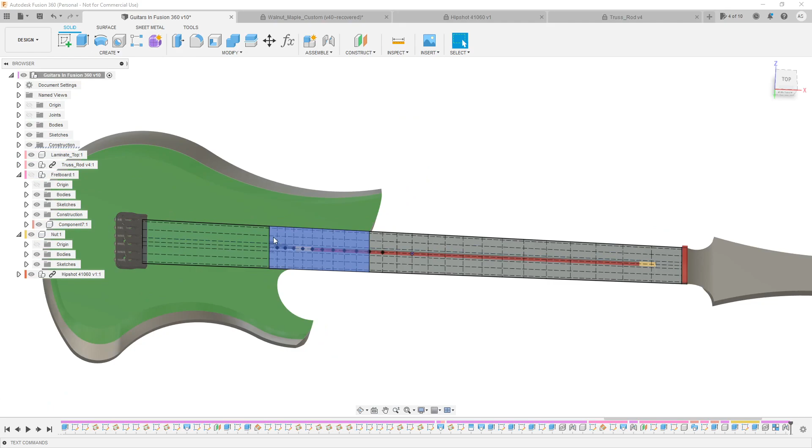Let me hide the sketches. There we go, fretboard with the fret wire. We got the nut roughed in, and we got the bridge set. So I'm pretty happy with that.

All that's really left to do is, because we did all of this, we set ourselves up so that we now have enough information on where to place the pickups and the pickup slots. We now know where the strings are going to be going through the body, so we know where we can place our control cavity, our knobs, and our tuners.

So the very next episode, I'm going to go ahead and cover all of that, and we're going to try to wrap up this series. I may at some point in the future, when I actually start building this guitar in real life, go over the CAM side of this, but for now, because the baby's on the way, the next episode is going to be the last episode.